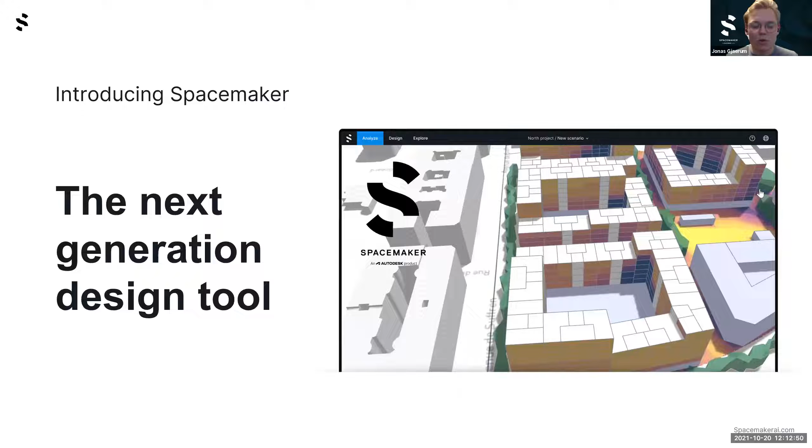So he created Spacemaker, which is essentially a cloud-based, easy-to-use platform that lets you reimagine the early stage planning phase.

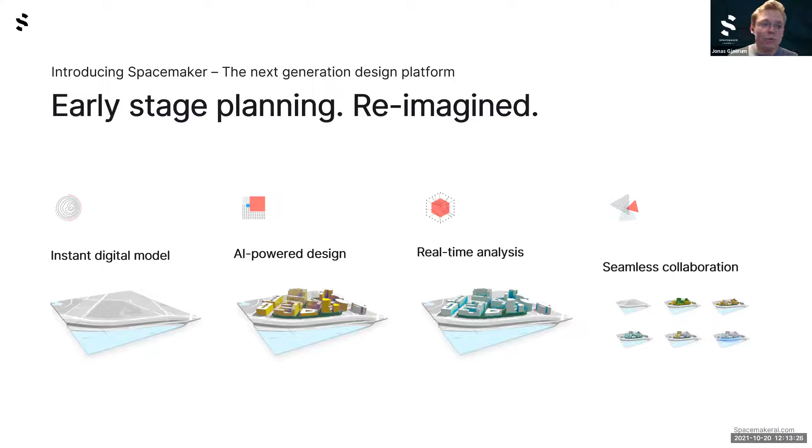And at its core, Spacemaker has four core value pillars of capabilities. The first is instant digital model. You have AI-powered design, real-time analysis, and seamless collaboration. I will go through each of these in sequence.

So if we start with instant digital model, Spacemaker lets your user select an address or location anywhere in the world, and within minutes, you get a 3D model of the site and its surroundings. This enables you to work digitally from the get-go, using either your own data, data on surrounding buildings or the terrain, or one of the automatically sourced data sets within the platform.

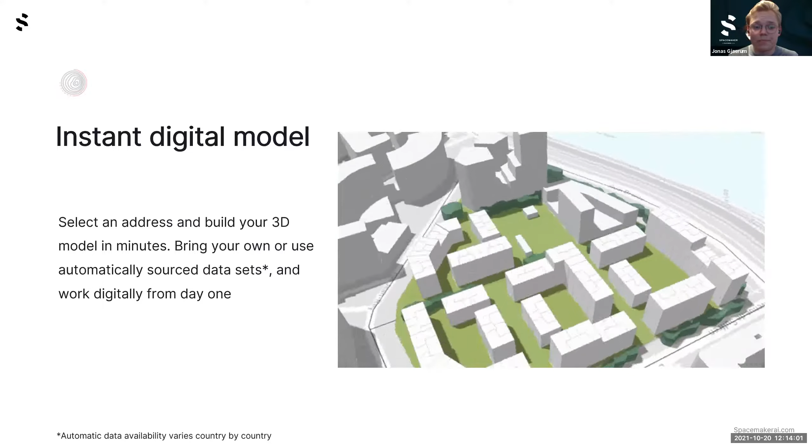And once you set up your site, you want to design something. Spacemaker lets you leverage a host of different design capabilities in order to give you as much flexibility and power as a designer as possible.

So Spacemaker lets you use freehand drawing, parametric design, generative design, and also height optimization of buildings. This makes it very easy for you to explore a lot of different workflows and design proposals within a very, very short time.

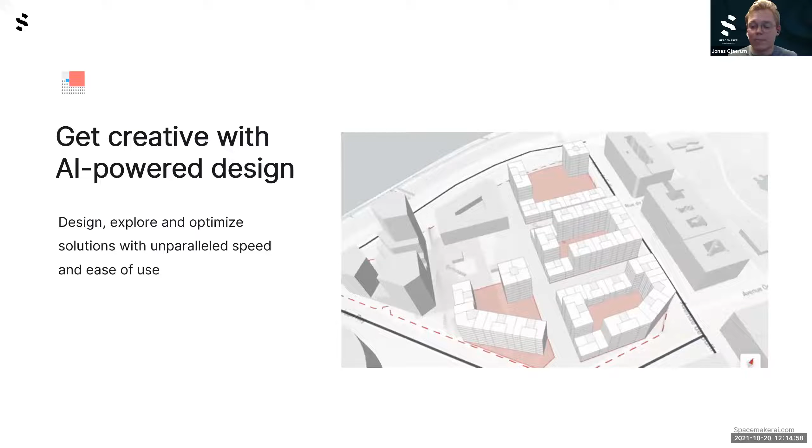And it also lets you work seamlessly with the BIM tools of your choice, so you can import and export models to and from Spacemaker and continue working with them in other software once you find the solutions that you want to continue with.

Now, a very significant part of the Spacemaker platform is the analysis capabilities, where you can simulate and predict the impact of your proposal by using detailed and accurate analyses of a lot of different criteria and constraints. And this is the first time that as a user, you can get a lot of these insights so early in the process, because this is when you truly make the decisions that you need to live with, the large decisions on how to place your buildings that you need to live with for the rest of the project.

And doing that in an informed way enables what we like to call outcome-driven design, when you design a proposal based on the qualities that you will get out on the other side.

And we have a lot of different analyses that the user can leverage. They range from geometrical analysis of the site, the buildings, and down to the apartment level, to analysis of the surroundings, how steep the terrain is, how much outdoor area is available. You can also check for regulatory requirements, for instance with regards to parking places, spacing between buildings, or noise conditions. And last but not least, Spacemaker lets you analyze a lot of living qualities that have previously been very hard to quantify in such a short amount of time.

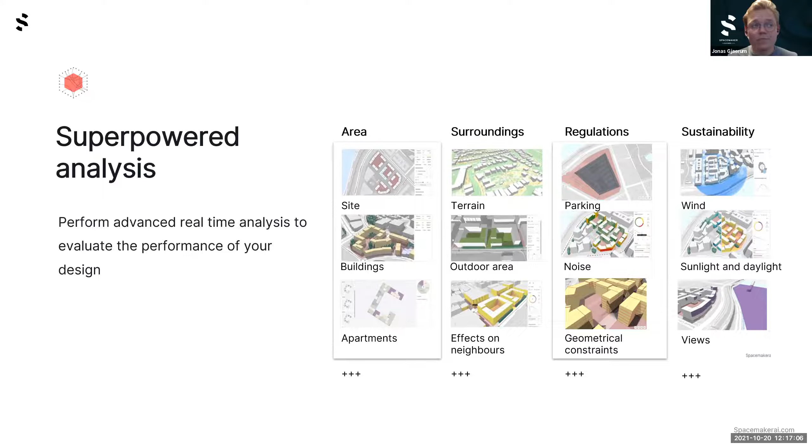And lastly, another really big thing is that Spacemaker enables transparent collaboration and communication between the different stakeholders in a project, of which there typically are a lot. The fact that Spacemaker is cloud-based means all you need for it to run is a laptop with Google Chrome installed, and you're good to go. And because it's so easy to use, it makes it easy to invite people from different stakeholders into your project, see them in 3D, look at the statistics, enabling a truly fact-based decision at this very early stage.

And this essentially creates a lot of more productive dialogues that go a lot faster than before and leads to better decision-making faster.

Better decision-making, faster, is a very important part of what we consider the key value proposition of Spacemaker. If we boil it down to three main buckets: first, save time by automating and speeding up tedious tasks. Second, reduce risk in your projects by getting more facts earlier in the process. And third, improve the value and quality of your design by getting instant feedback on the qualities immediately.

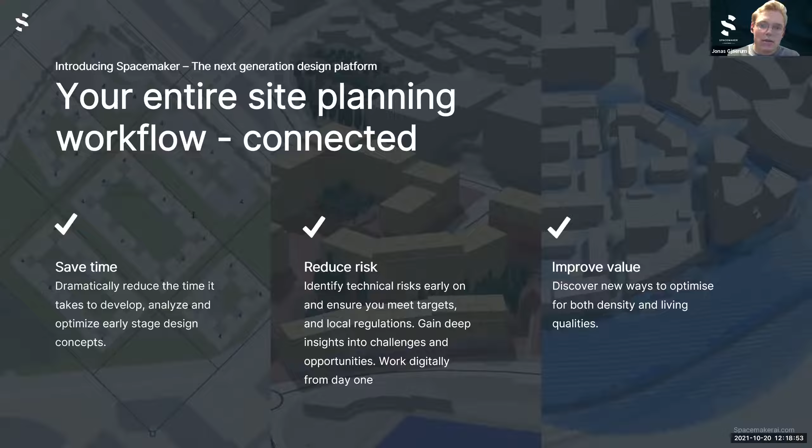To give you an example, I wanted to share a story from a leading French architecture office called Valode et Pistre, who had been using Spacemaker for a while and wanted to truly put the software to the test. They wanted to see how much faster you can do the process with Spacemaker compared to their traditional process, so they had two teams internally compete against each other on the same feasibility study.

What they found was that the team using Spacemaker managed to develop their first concept 35% faster than the other team, saving them two days of work. Moreover, on the subsequent designs they actually worked twice as fast as they otherwise would have.

I think the quote from their BIM director sums it up quite nicely: this not only made them work quicker, but it also made it possible for them as architects to work creatively, spending less time on tedious calculations and more time to think about the project and design to make a better design.

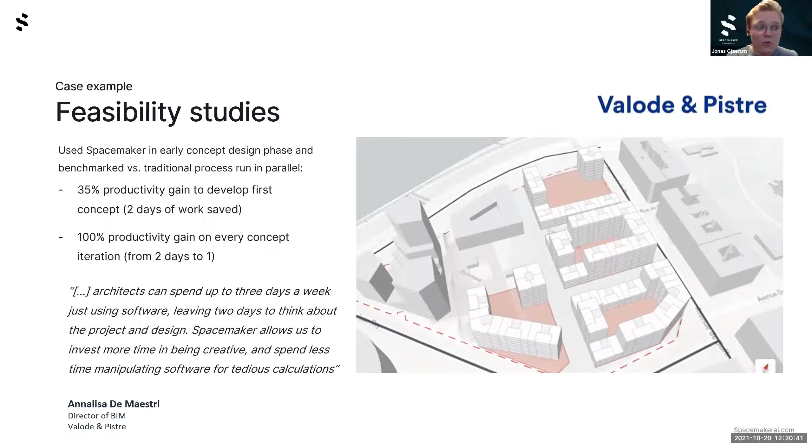So that's a lot of talk, but I also wanted to show you guys how it works. Feel free to raise any questions at any time, and I will try to address them.

Let me switch the screen that I'm sharing for a moment. It's all black now, right? Yes, I assume so. All right.

The video I'm about to show you demonstrates just some of the different capabilities of the Spacemaker platform, and there's a lot more to it than I'll have time for. I see I have 8 minutes left, so what I'd truly recommend is that you explore the platform yourselves and test it out. We'll get back to how you can do that after showing you the video.

When you start a project with Spacemaker, the first thing you do is write in the address of your site or location, and you get thrown into the exact location you want. This can be anywhere in the world.

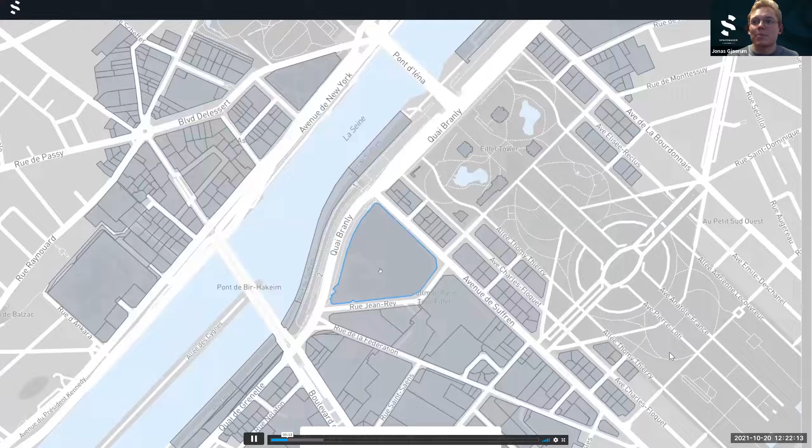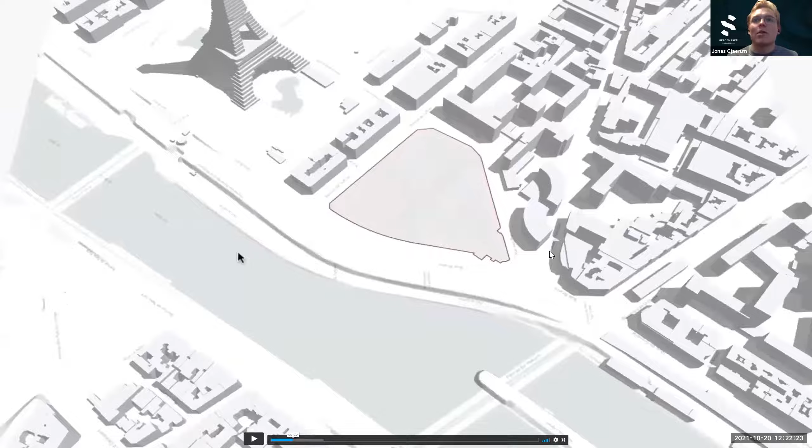You start out by marking out the area around the site. Spacemaker will use local data sources to automatically fetch data on terrain and surrounding buildings, which depends somewhat on the location and which data we have. But you get this 3D model within just a matter of minutes. In this case, you can see we have this quite nice location in France.

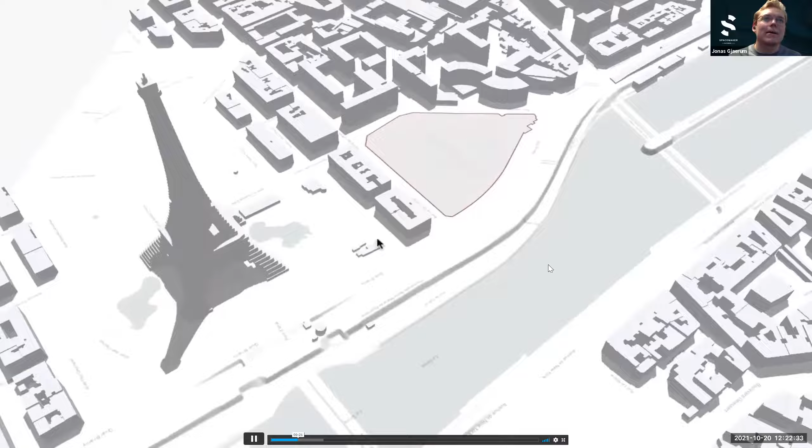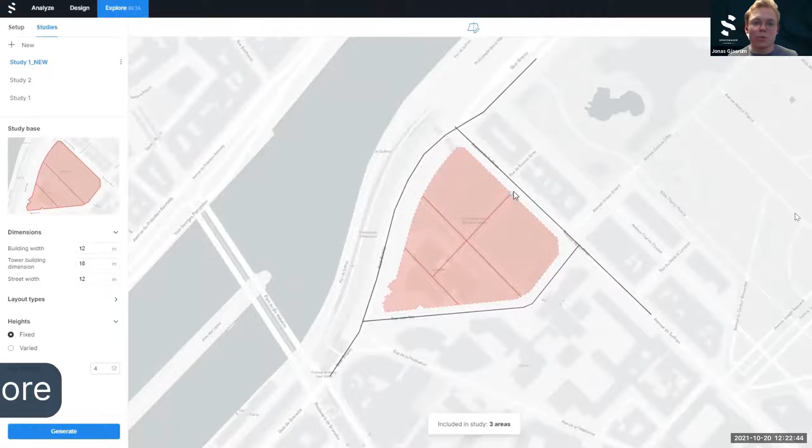Once we have the site set up, you can use one of the different design capabilities to start exploring different options for the site. For instance, one way to get started is to use Spacemaker's generative design feature, called Explore.

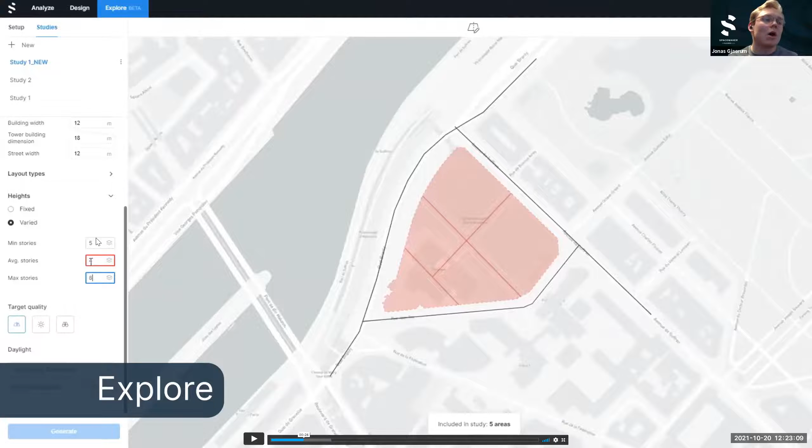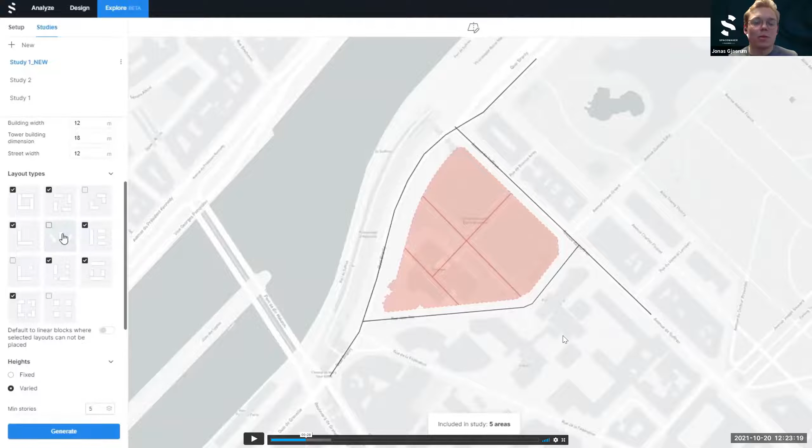You can do that by dividing the site into a few different lots, and input some parameters that you want the machine to work with on the left-hand side. You can choose how high the buildings should be, and which qualities they should optimize the heights for. You can also choose different typologies you'd like the machine to work with, and whether you want it to work with fixed or varied heights.

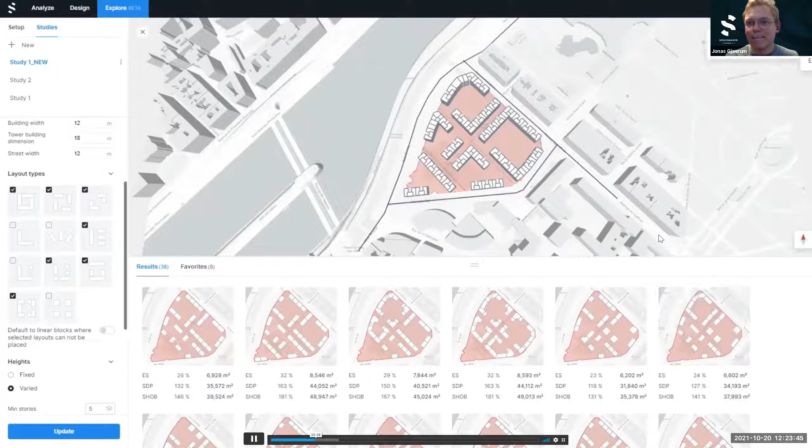You hit the button, and within just a few seconds you get tons of different proposals that you can evaluate. These numbers are in French, but they represent building coverage, gross floor area, and gross internal area, plus relative ratios towards the site size, so you can compare them against each other.

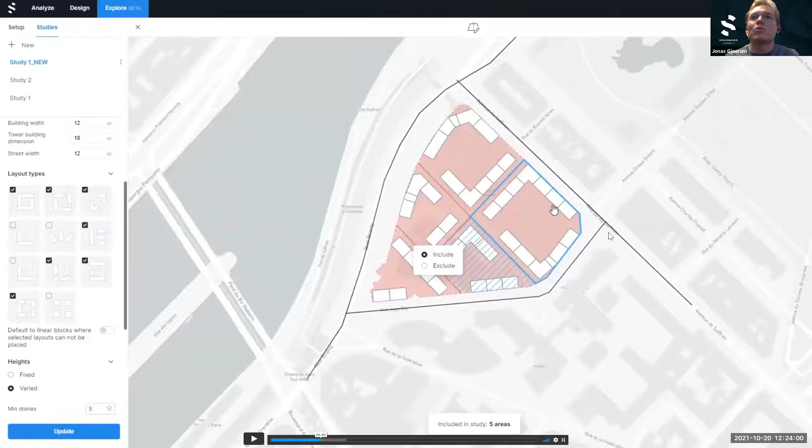You can quickly move between proposals, and if you find one you like, you can choose to continue working with it. In this case, you can even continue with just parts of what the machine generated and run another generative process for the rest of the site.

We also have other design tools, both in 2D and 3D. Here we can see our line building feature, where you can use parametric design to get some closed city blocks, for instance, that you can continue working on with freehand.

You can easily copy buildings, paste buildings, push, pull, drag, and delete, all super quickly, while generating automatically apartment layouts. Here on the right-hand side, you can also see the apartment size distribution between different sizes. Here it's in square meters, but in the US we support square footage.

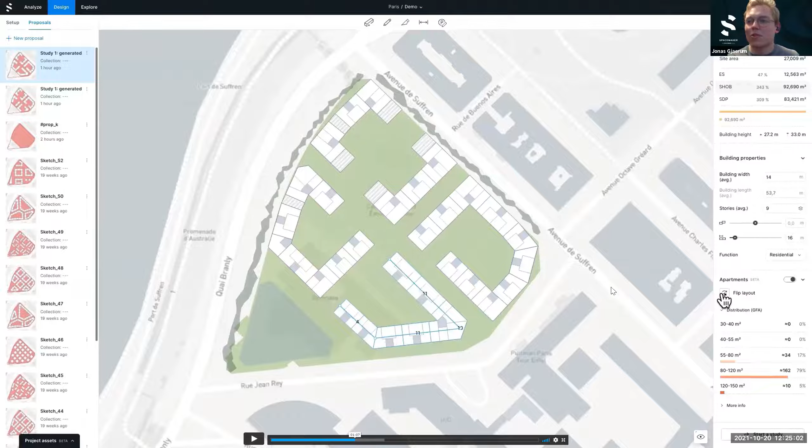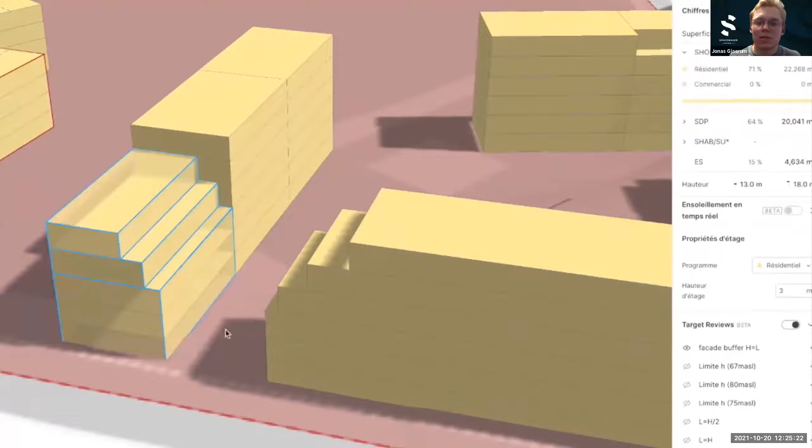We can also, if you have constraints for how close the buildings can be to each other, insert them in Spacemaker and get instant feedback on whether your buildings are adhering to the local regulations.

And all of this you can also use in 3D. Here we see an example of using line buildings, where essentially a user draws a line and Spacemaker generates a building around that line with apartment layouts and a building core automatically.

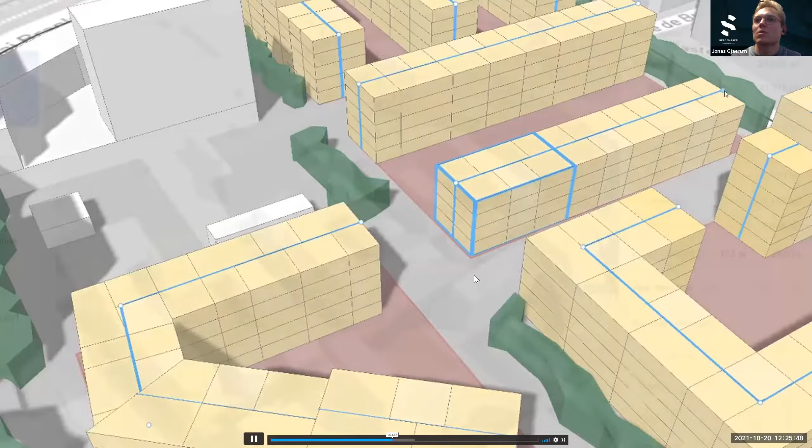If you're working on a mixed use project, or you have, for instance, parts of the project with affordable housing, etc., you can give buildings or floors different categorizations, and choose to analyze these individually.

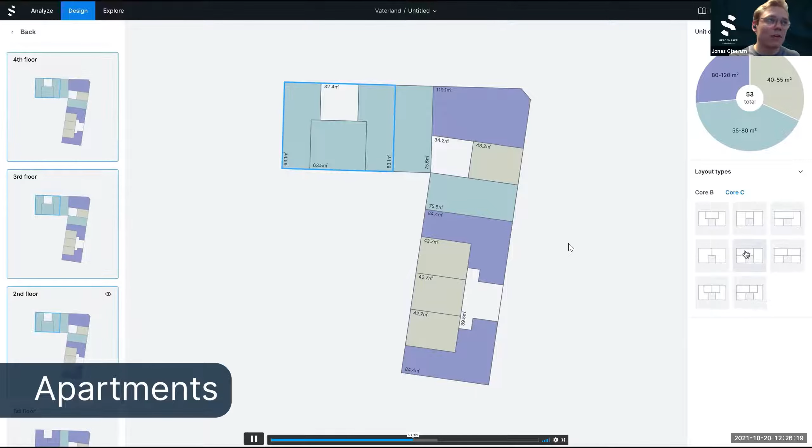You can also work down on the apartment layout level based on the apartment library that we have available for you in the platform. See here in the upper corner how the unit distribution varies as a result of which type of core or which type of apartment layout that you go for.

So here we can see that we have a lot of some large apartments and some smaller.

We also support parking, which always is a pain for a lot of our users, and we're happy to help with that. So you can draw a polygon and get parking spots generated automatically, both how many parking spots you have and how large it is, all based on input parameters that you yourself make, for instance, on how large or small the parking spots need to be.

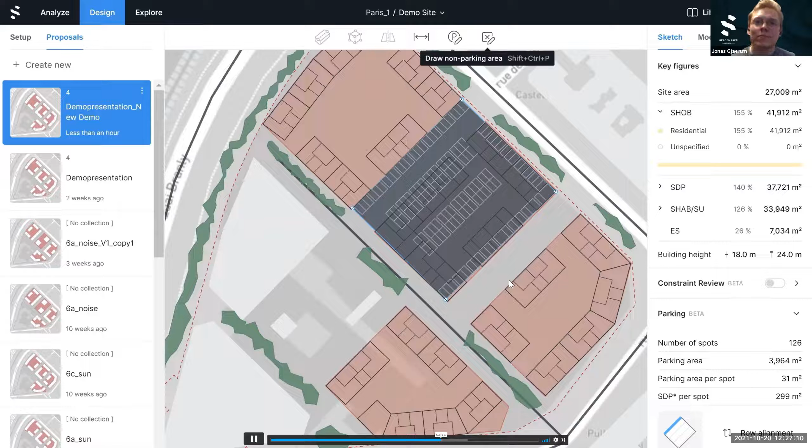And last but not least, or second to last but not least, we have the analysis capabilities. So here we have the sunlight analysis, which essentially, what you input is the date of the year and which time of that date that you want to analyze. And Spacemaker analyzes how many hours of sun each point of the facade is getting.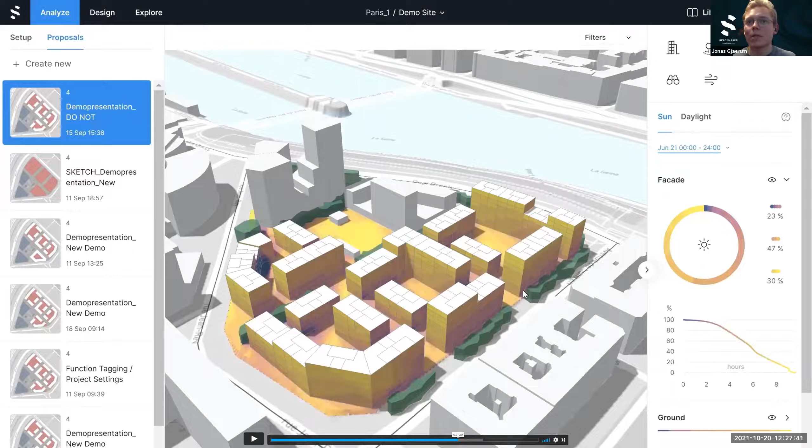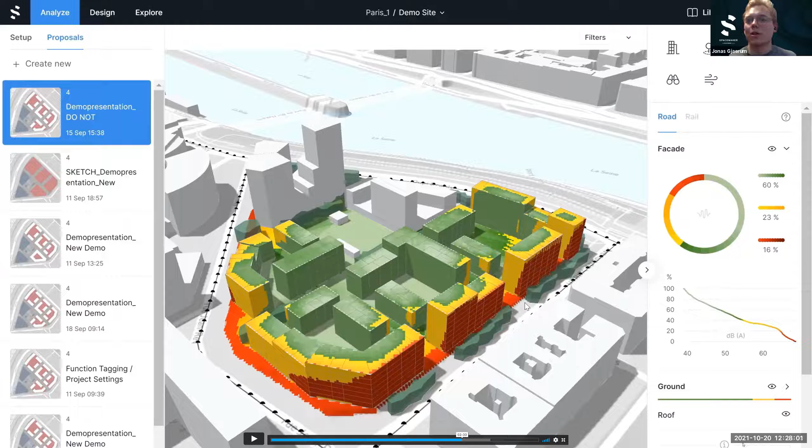This is very important because it essentially enables you to find solutions where apartments are not in the dark. And similarly with noise, you can use traffic data on the streets surrounding the site and simulate the noise level that each apartment will have, so that you can ensure each apartment will get access to a quiet facade, for instance.

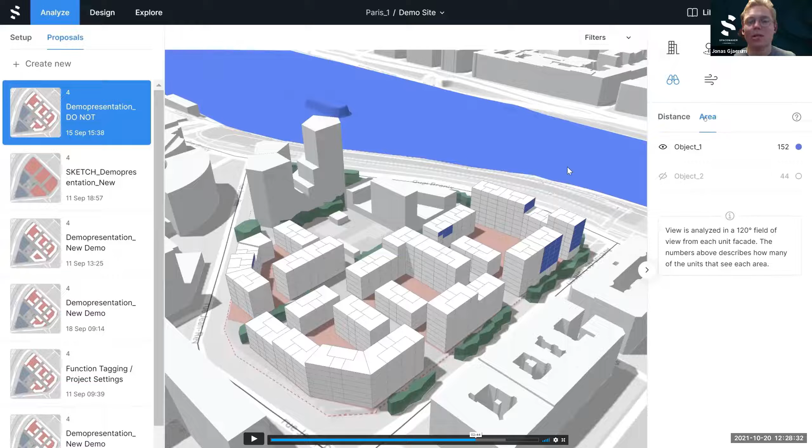We also have, and this is a personal favorite actually, the view to area analysis, which essentially lets you draw an object of interest around the site and see how many apartments have a direct view towards that object. In this case, we have chosen the river, and we see that 152 apartments have a direct view towards the river, which is pretty cool.

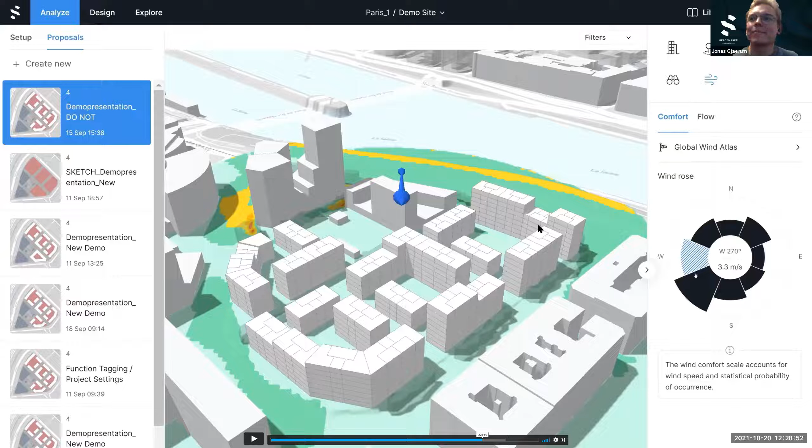And then we have, for instance, wind analysis, where by using data from the global wind atlas, you can see whether your design will make any wind tunnels, making it uncomfortable for people to actually be outside on their site.

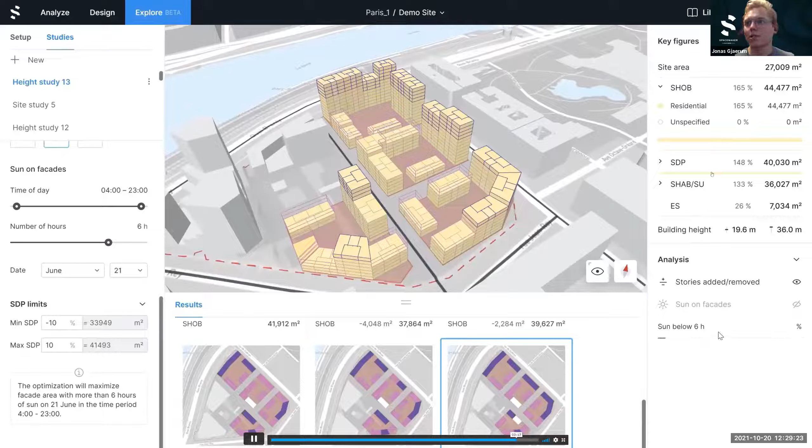So once you have your footprint in place, you can also use our height optimization engine to distribute the building heights to optimize for the quality that is the most important to you. For instance, you can minimize the number of apartments that has bad sun conditions, or maximize the number of apartments with a view towards the river.

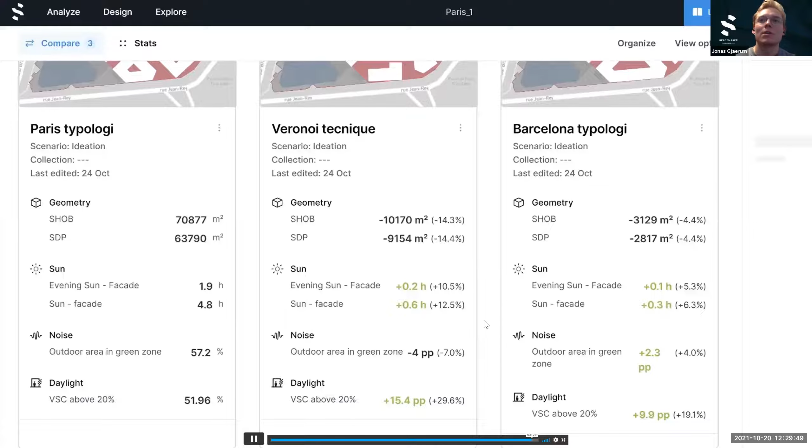And now, once you have a few different options that you like, you can compare them in the library mode, where you can choose the different parameters that matter the most to you and compare them side by side against each other, truly enabling the fact-based discussion that I was talking about.

So that is a very quick overview of the Spacemaker platform, and I hope you found it interesting.

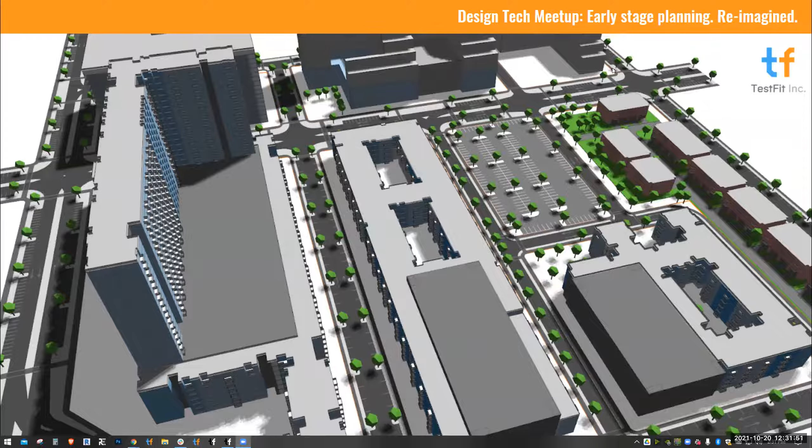Alright, so Clifton Harness, that's me. Let's see, I've got this window in the way. Alright.

BArch, UT Austin, 2015. I spent an enormous amount of time in architecture firms during college, 3,000 hours as an intern. Never worked after college in architecture. I went right into real estate development. Multifamily, new urbanist real estate development is kind of my DNA.

Co-founded TestFit in 2017, and then feel free to follow me on Twitter. So our mission is to democratize data-driven building design by solving feasibility for commodity buildings.

And we've had a few milestones. We raised $2 million in January 2020. I've got 13 employees now. We all met finally together in one place, 2 weeks ago. It was incredible to actually see these people in real life. Just the reality of running a startup during COVID.

Their resumes are incredible. We've got BIMTrack, Structuresoft alumni, director of sales, got Brookfield Properties background, customer support. He comes from the third largest multifamily architecture firm in the country. I've got a computational design genius from Buro Happold, a couple of employees that have Katerra on their resume, and an engineer from SDS2. So we have 13 employees, but every single one of them is a thoroughbred, amazing employee.

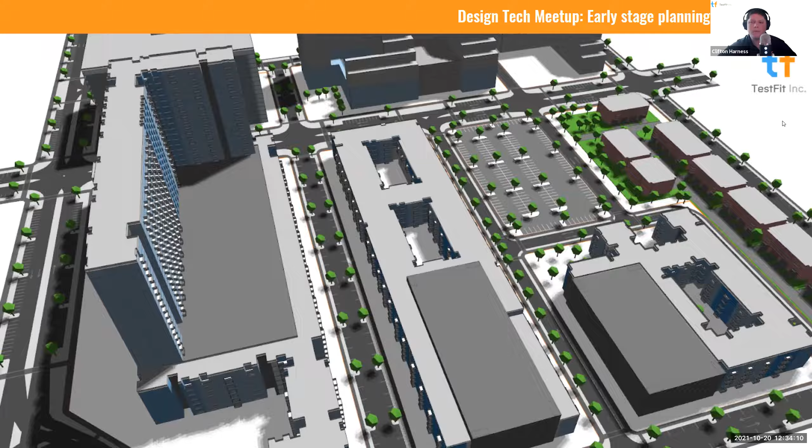And then we have one major integration with Enscape, which will be released, I believe, tomorrow morning. So that image from before, this is what it looked like just in our native software. And then when we turn on Enscape, it's literally night and day difference. So we're pretty excited to bring this rendering technology to our customers.

Our historic focus has been on housing: wrap, podium, garden, volumetric modular, SFR, townhome, wrap, podium, liner. That is most of our effort in the product. And our customer breakdown within there is actually architects, developers, and general contractors.

So it was very important to us early on to get the buy-in from at least two of these three, and have users actually paying for it from these different industries. And so we are probably the one and only configurator on the market today that architects fund more than 50% of the development for. So we're very proud of that, and we're going to keep going in that direction if we can.

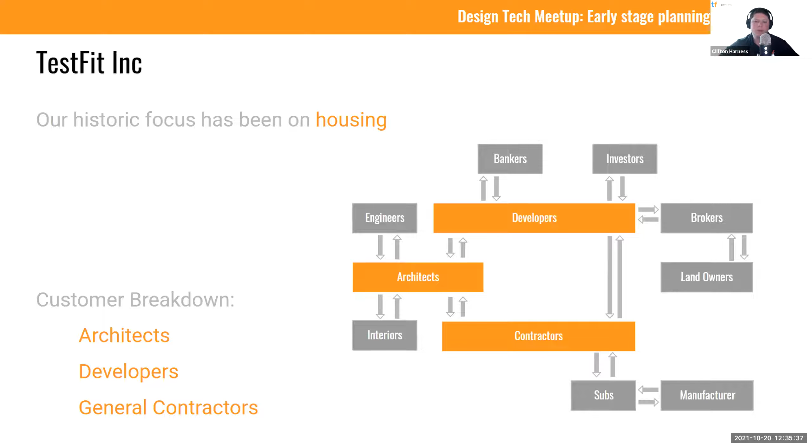So when we look at the market, or when I look at the market, this is kind of how it looks in my brain. You've got these really close relationships between architects and their engineers and their contractors and interiors. But then the developers, they've got their relationships with architects, bankers, investors, brokers, and sometimes even landowners. So having an understanding of what everybody else's perspective is, is really important to building feasibility software for commodity buildings.

And I'll get into that here in a second. So deal cycles are opportunity costs. Let's say a developer has a piece of land that they're interested in. They'll send it to an architect, they'll draw a site plan. The developer will then, when the architect's drawing the site plan, it's about an 8-hour process. As our Spacemaker colleagues have kind of stated, it's not a simple process, it takes effort.

Then they'll draw a site plan, they'll send it to developer, they'll get a bit more of an idea of what the deal is with a unit count, but they need to go get hard costs, understand if this project actually pencils. So contractors, they'll give a much better idea about how expensive this thing is, with what their assumptions are. And maybe they'll talk about materials, means and methods, whatever. And then it'll go back to the developer. So now he'll have a site plan with hard costs, with rent assumptions, and he'll have almost everything that he needs to go to the bank and investors for a project to move forward.

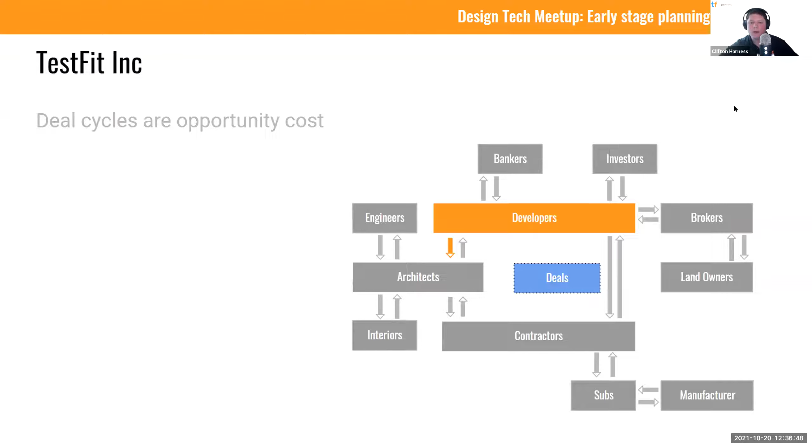So it's right here where TestFit lives. Our success comes from focusing on deals. We don't get into the SD phase. We've drawn a pretty big line in terms of not trying to get into further down the process, or what I would deem like CAD/BIM territory. So we focus on deals.

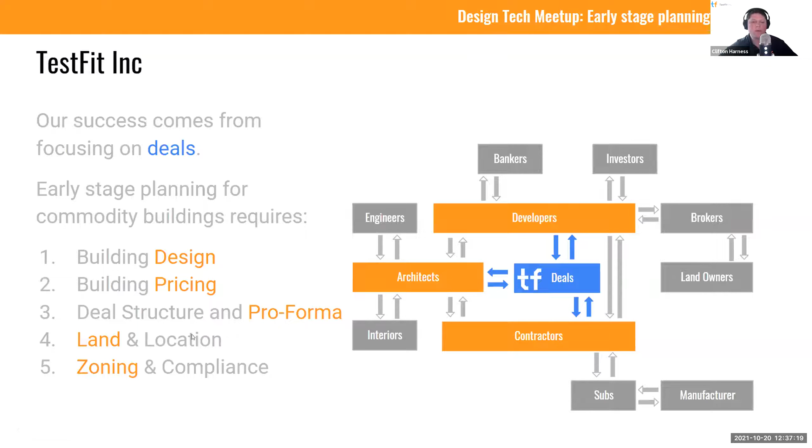That means that the building design is kind of the core thing that we build everything else off of, with the pricing, the pro forma, the land, and the zoning. So let's go through a couple of these.

High praise. This is Tom Rettenauer. He runs a 12-person architecture firm in Virginia. Here's what he had to say about us: it decreases the design time process, increases the number of potential solutions, and allows his firm to be more competitive in making deals. They're able to use TestFit to help developers and city planning groups understand the future of site layouts.

Here's a more numeric, simple case study, a project we worked on using TestFit. The St. John's project had a 12.5% increase in units, so of course the developers get really excited about that value add. I guess the third major value of a configurator is that you can increase the value of the project.

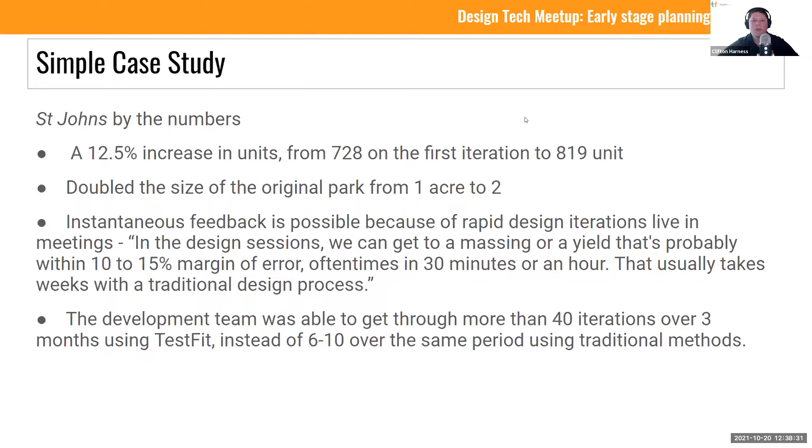We doubled the size of the original park, so it had a park function, and we were able to make the building quite a bit more dense. The instantaneous feedback gave them the ability to go through significantly more iterations than they would have been able to otherwise. All right, so I'm just going to jump into a product demonstration.

It's not going to be a very structured demo, because we're just going to look at maybe one site and then decide what to do with it. This is maybe a TestFit file about 30 minutes in, maybe less if you're skilled.

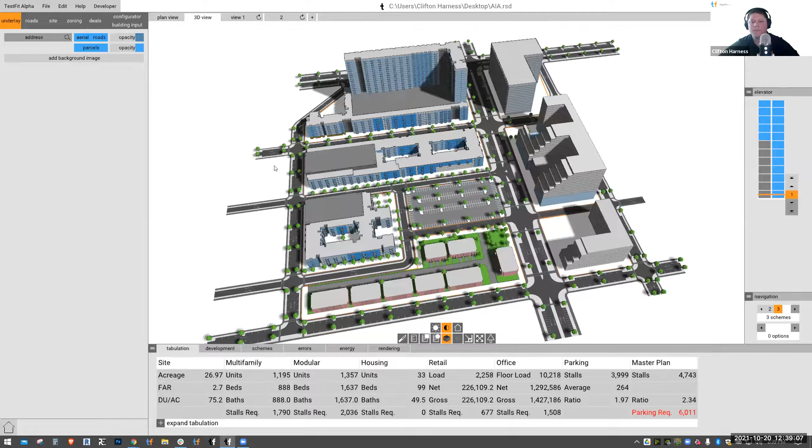The thing I don't like about it is I've got a parking lot in the middle, and I've got this low density townhouse thing here. I might want to make a more dense area. So it's not a real master plan, but it's just a quick demo site, and we can do a real site in a couple of seconds after we do this one.

So we have, like I said before, a bunch of configurators. Within there, we have roads. For example, this road right here, I can go into the road editor and start to edit this street section. Here we have some assumptions: on the parking run, it's a 90-degree angle, the planter width is 9 feet, and the max run is 90 feet.

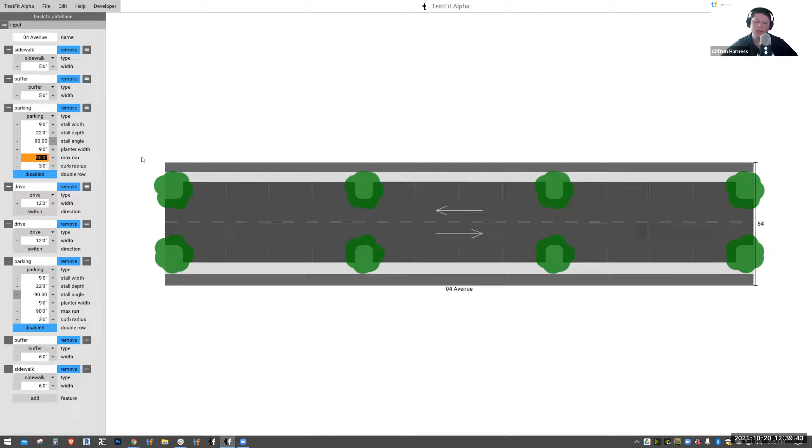If we want more trees, for example, we could set this to 45 feet, and we end up with more trees. So I'll go back to the main site plan, and you can see the parametric road section has been updated in every single place that it is. That same sort of nesting of parameters inside an object and then laying it into a master plan or main plan is the broader vision of what we do, at every level.

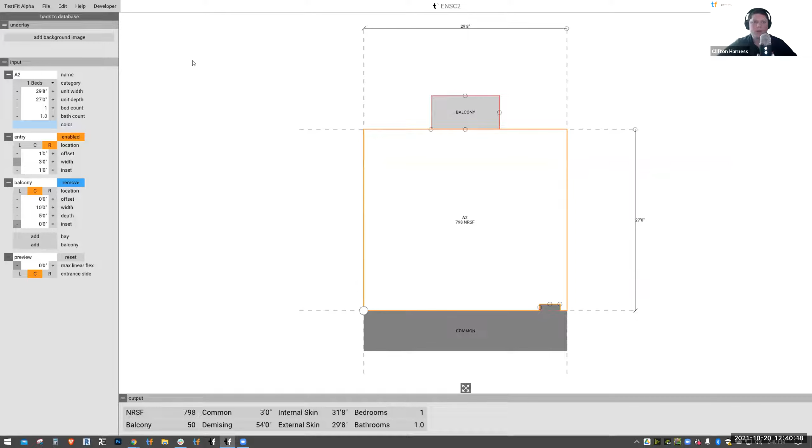So if I go into a multifamily site here, we'll have a unit, and inside that unit is going to have information about what that unit is. So it's parametric. Buildings are made up of units.

So this is the kit of parts that is then laid on top of this building right here. The users can specify from the configurator what the weight percentages are for those units. So it gives a high level of customizability with a high level of speed.

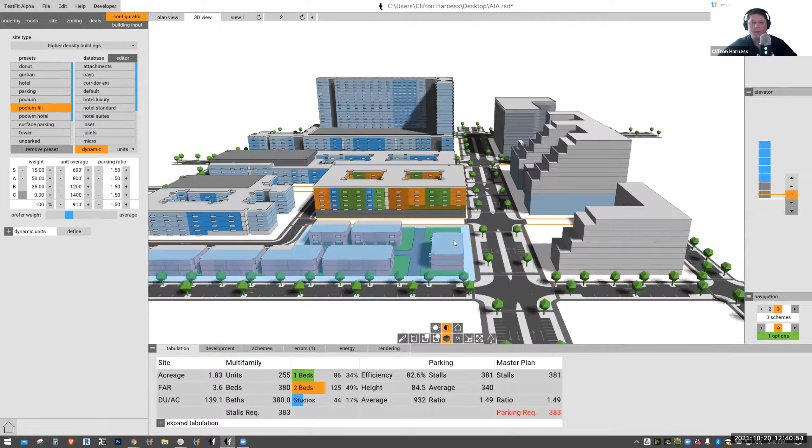What I mean by that is I can go to this site here and say, give me a podium-style building, and we change it from a parking lot to a double-donut deal. Finding the highest and best use is what a lot of the development guys are trying to get to, and they historically do it through an architect that moves at about 8 hours per iteration, which is probably the slowest part of the market in real estate deals. So there was a huge need to automate this part of the process.

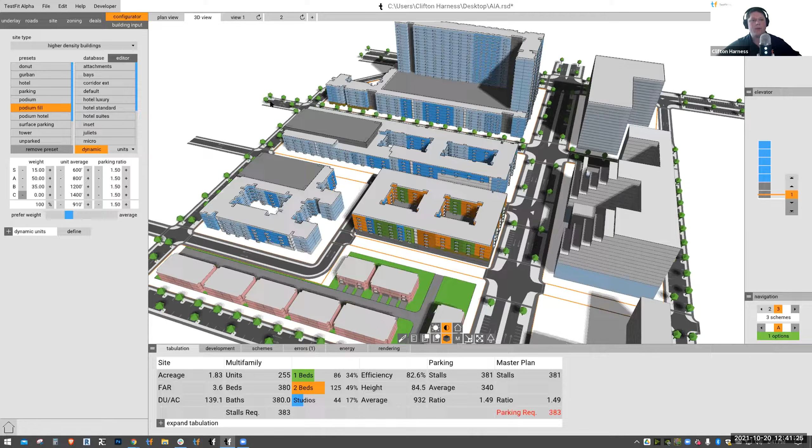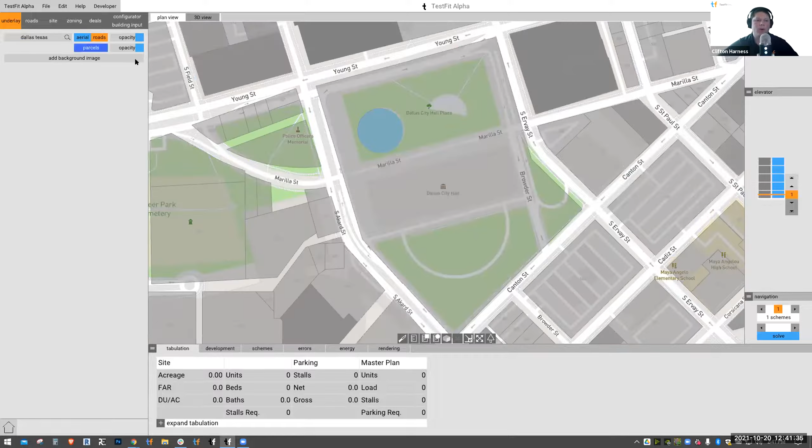So this is a bit more of a finished one. I'm going to hit reset. We're going to go to Dallas, Texas. I'm going to click parcels, load in some parcel information, go to site, and define from a parcel.

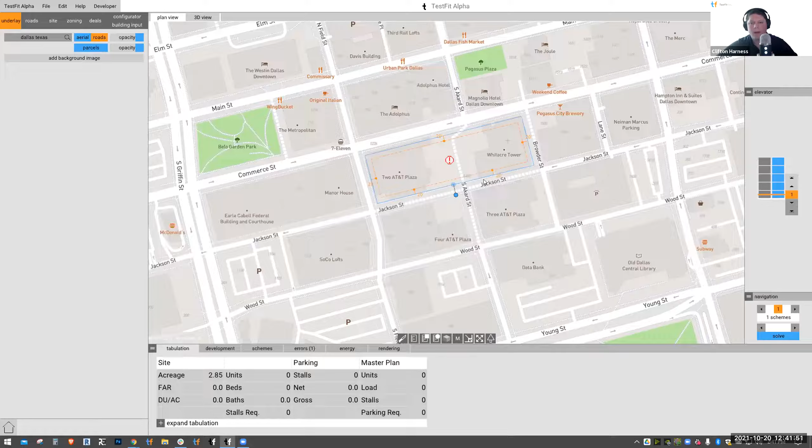I'm just going to grab maybe an assemblage here. So I painted a bit of an assemblage, defined from parcels, and turned them off. So I got my site here, and it's telling me, hey, you failed to solve the site. Well, that's okay, we're going to go to the configurator. Right now our options are telling it to draw something that it can't fit here.

Typically in the US we have different morphology when it comes to typology changes. What I mean by that is, like, a wrap building has a rectangular garage that's precast, and it has some constraints of its own that really affect how the rest of the site can be designed.

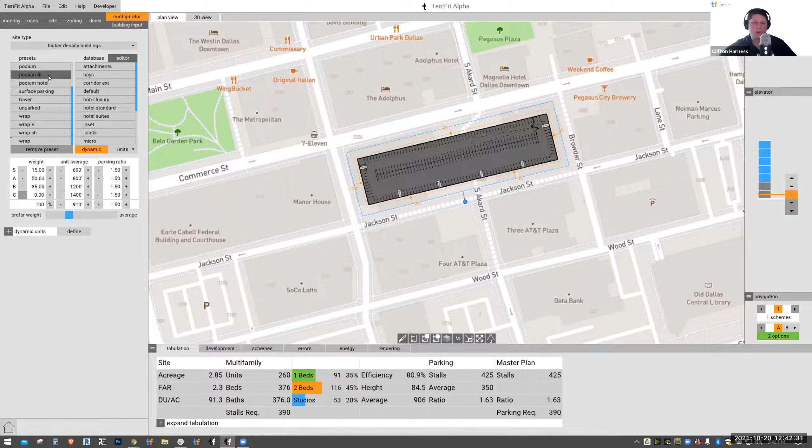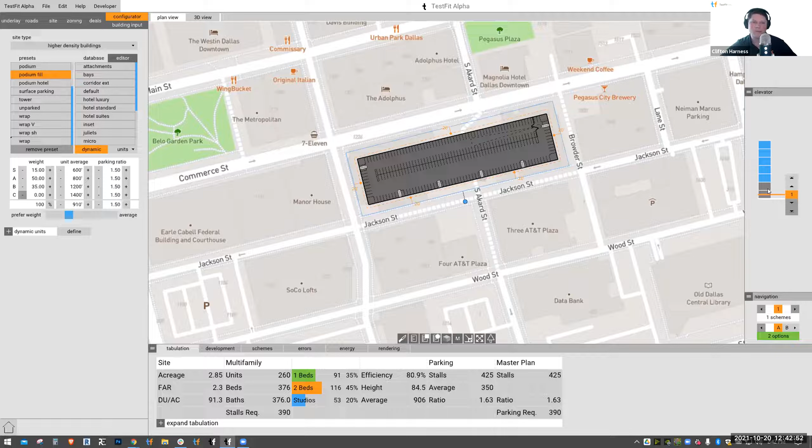Right now TestFit is trying to draw a wrap here, but it can't fit a wrap. So what can it fit? A podium. It can put as much parking on the ground floor and then put building on top. We have this issue in the US where morphology drives typology and vice versa, so we have to be very specific with how we treat geometry, which leads to TestFit having to build 15 different configurators to solve 80% of what the housing market wants out of a configurator.

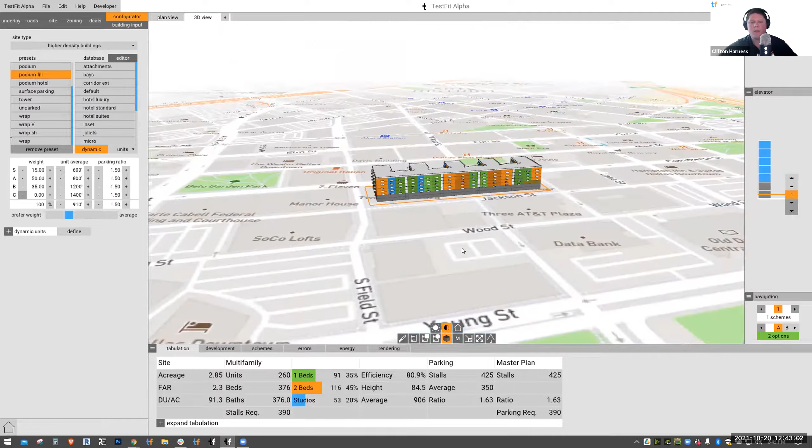Any questions so far? You guys can shout from the audience things you want me to do to this building in real time to make it a better building. Right now it's addressing the street in a really poor way. Y'all are architects, what would be a great way to configure this building?

Anybody in multifamily out there? I guess we'll go into questions if nobody has anything. I know there are a lot of architects on the call, feel free to speak up.

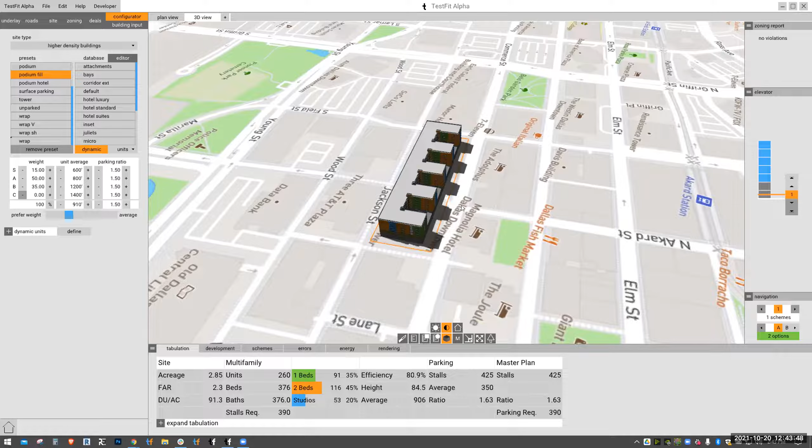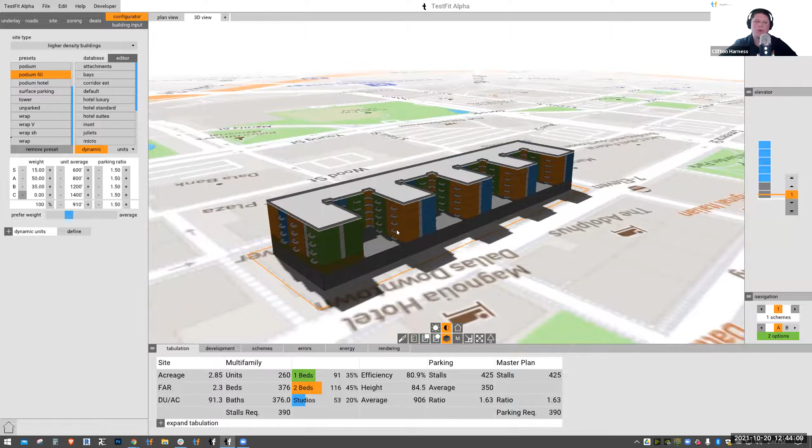TestFit models are basically created from TestFit information, unless it's a Revit group, then we can build a kit of parts from that Revit group for interoperability with Revit. To get a SketchUp component, you export out of TestFit and open it up in SketchUp, and everything is a component if it's in a stack. It's a nice export, practical and useful.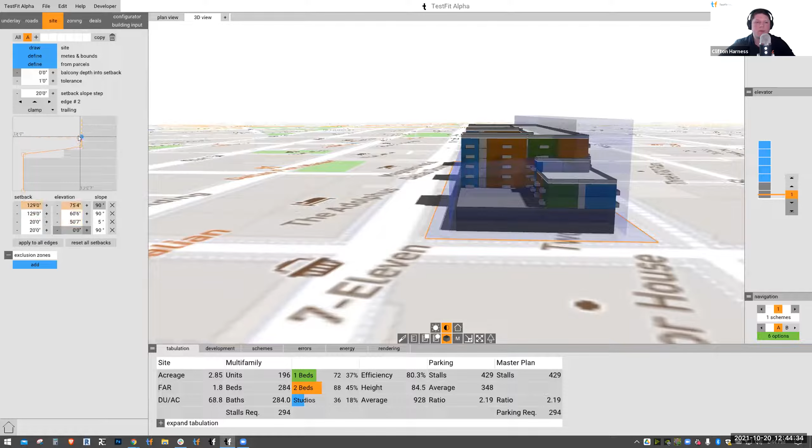Okay, I'll ask you a question. Sure, go back to your model. So it's all one level, one floor plate type, but if we have a setback at height or something, we can start to manipulate how that is solved from the site. I think I'm in an experimental version of TestFit though, so it might not be working. There we go, get a bit of a setback.

Can you say require that there be a certain volume or a certain number of units, and then whatever you do pushes it in another direction? So TestFit is a configurator, it is not generative design.

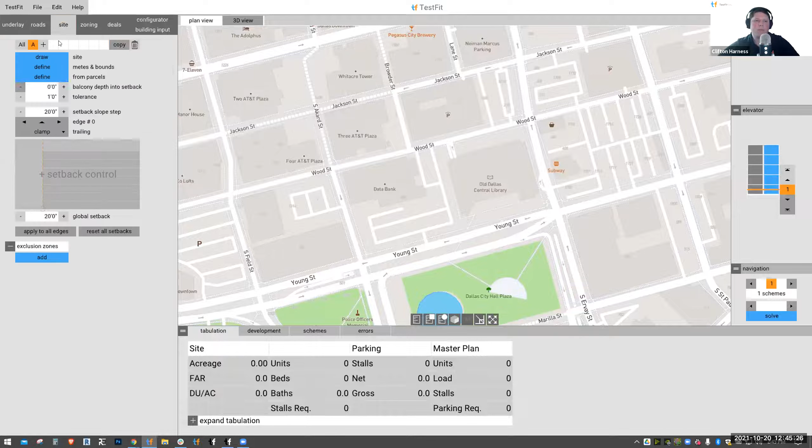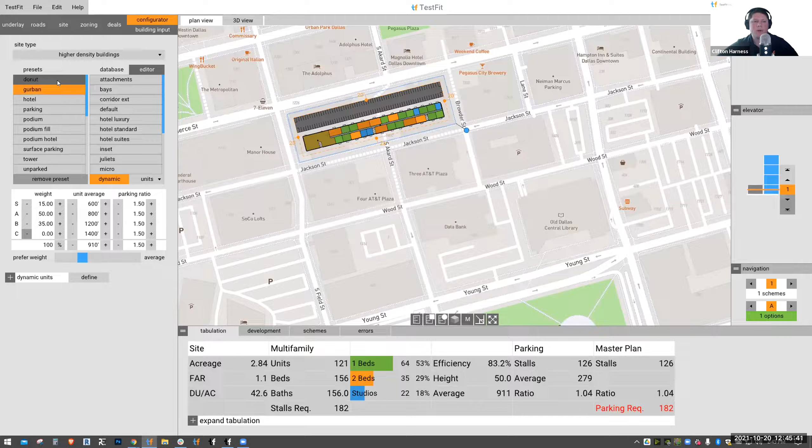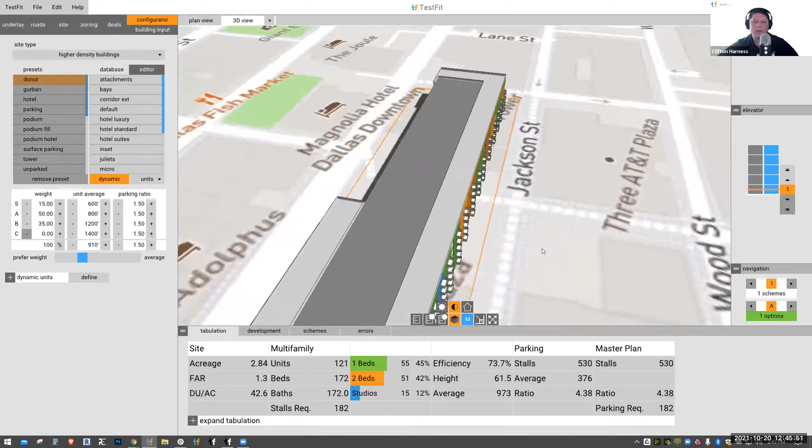What I mean by that is I could generate a surface parking deal or something, or a donut, and I can go in and start to edit the segments of the thing that gets generated. I think we were probably the first startup to release a product like this where it was co-creation: you generate, then edit. It's been really great to see the rest of the ecosystem head in this direction.

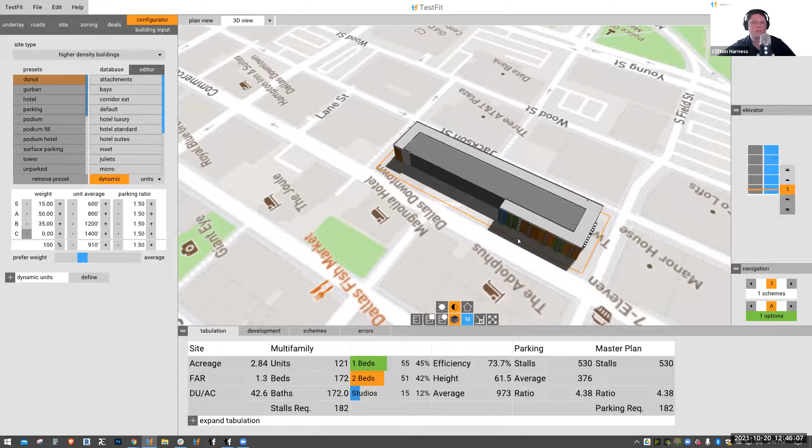So you have more, Clifton? More, or I mean, I can show you guys anything if you'd like. Am I at time?

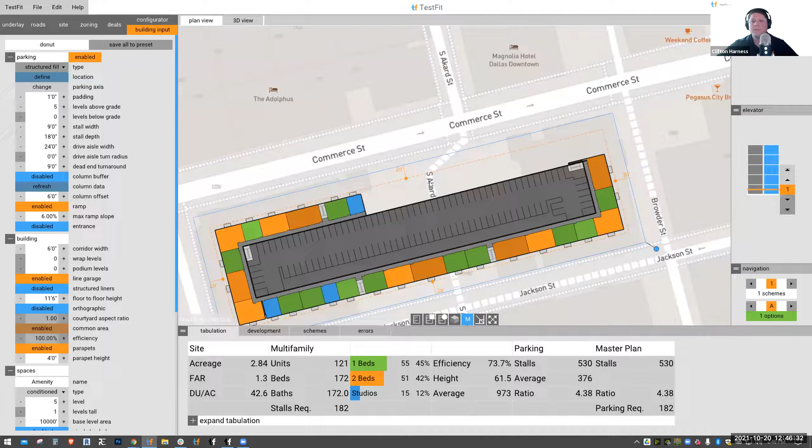I was just wondering if this was time to ask both you and Jonas some questions. Oh sure, yeah, that'd be great. Okay, I didn't want to cut your presentation short. Oh no, I think you guys get the point. It's parametric, it's Revit from the building level instead of from the element level.

So you use the term co-creation. Is it your intent that designers look at this as something which is allowing them to co-create? How would you explain that? So they can control every single parameter and every single part that gets put into the building from the lowest possible level, and then there's editable attributes from the highest possible level.

Essentially, every time you constrain a problem, you move more quickly. The architecture industry, when handed BIM, constrained it a little bit and can move a little more quickly. CAD is infinite because you can basically do anything. Here we're just constraining a bit more and getting the speed and efficiency of using basically nested Russian dolls to enact change across global parameters in a building.

So co-creation could mean collaborating with other stakeholders more easily than without these tools. It could involve collaboration, but historically co-creation means algorithm doing math, human doing creative work.